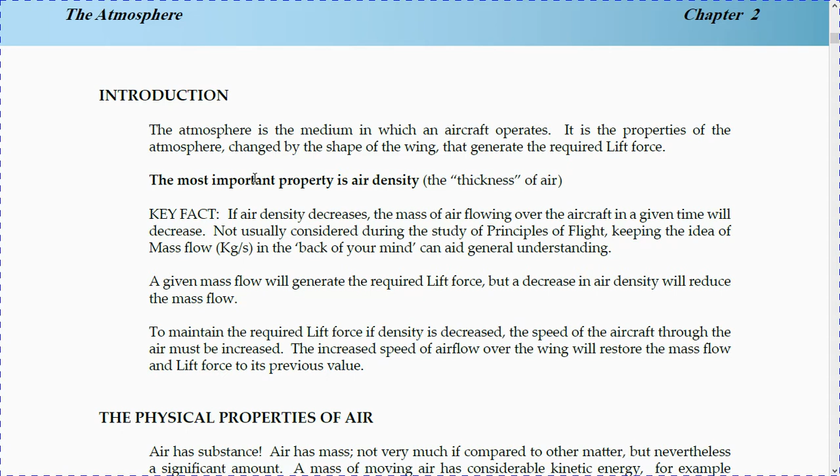Let's think of this as mass flow over the wings in terms of kilograms per second. A given mass flow will generate the required lift force, but a decrease in air density will reduce the mass flow. So to maintain the required lift force, if density is decreased, the speed of the aircraft through the air must be increased. So the increased speed of airflow over the wing will restore the mass flow and lift force to its previous value, as it says here.

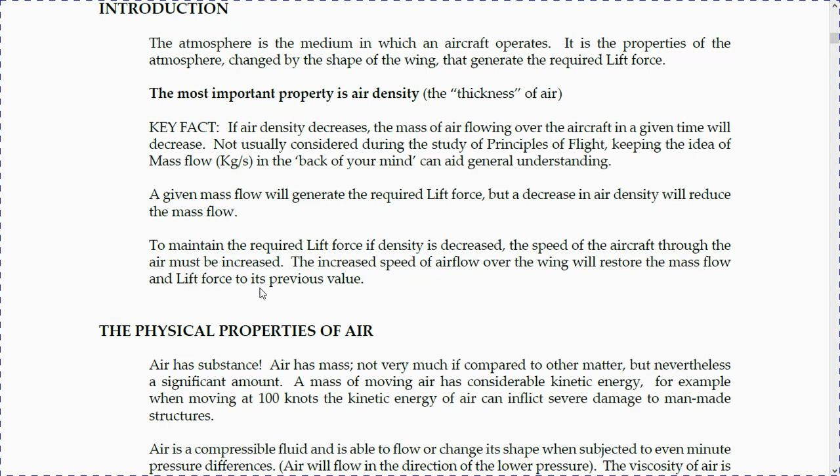So let's say, for example, 1 kilogram of air per second is passing over and under the wings. If the mass decreases, so the density decreases, let's say instead of 1 kilogram, 0.5 kilograms, 0.5 kilograms would need to pass over the wings not in 1 second but in half a second, so that in 1 second there will be a total of again 1 kilogram, if it makes sense. So there is the same amount in 1 second of a kilogram that passes through the wing, because it needs to be faster. So 0.5 kilograms in half a second would be 1 kilogram per second.

So, physical properties of air. Air has substance. A mass of moving air has considerable kinetic energy. For example, when moving at 100 knots, the kinetic energy of air can inflict severe damage to man-made structures. Air is a compressible fluid and is able to flow or change its shape when subject to even minute pressure differences. The viscosity of air is so low that very small forces are able to move the molecules in relation to each other.

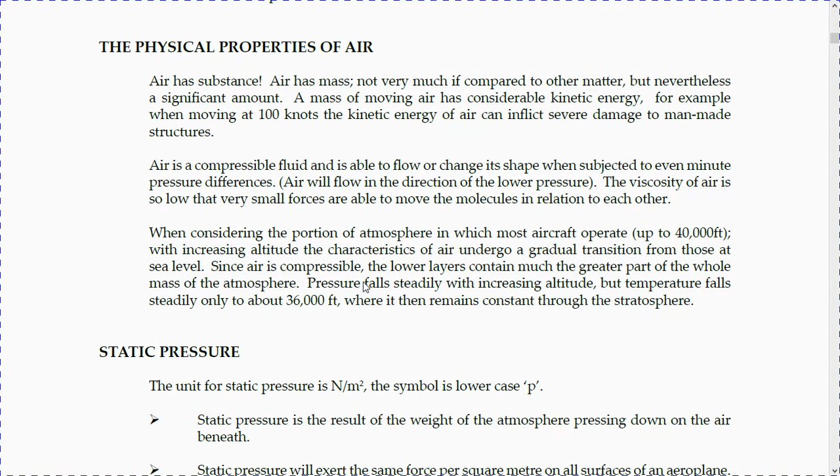When considering the portion of atmosphere in which most aircraft operate, so up to flight level 400, with increasing altitude, the characteristics of air undergo a gradual transition from those at sea level. Since air is compressible, the lower layers contain a much greater part of the whole mass of the atmosphere, if it makes sense. So air is compressible, so the lower layers close to sea level contain much more of the whole mass of the atmosphere, because the weight of the air plus gravity will make it compress. So at sea level there is much more air than as much as you climb, there will be much less air. So pressure falls steadily with increasing altitude, but temperature falls steadily only to about 36,000 feet, where it then remains constant through the stratosphere.

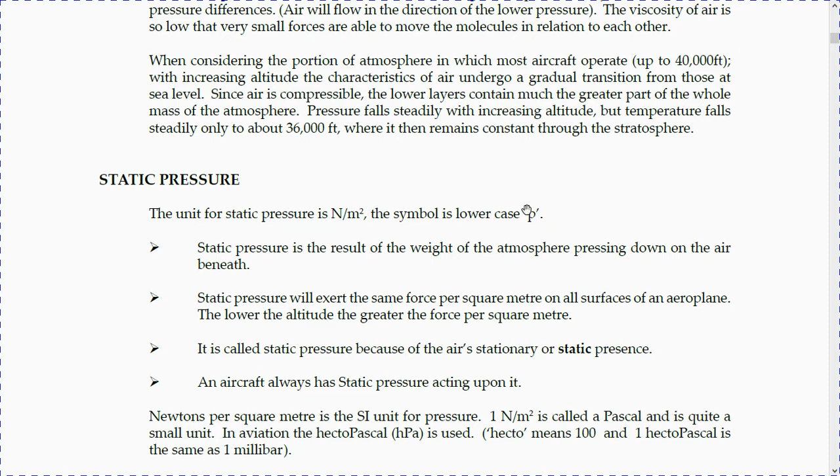So static pressure. The unit for static pressure is newtons per square meter, and the symbol is lowercase p. So static pressure is the result of the weight of the atmosphere pressing down on the air beneath, as I was saying before. Static pressure will also exert the same force per square meter on all surfaces of an airplane. The lower the altitude, the greater the force per square meter. It is called static pressure because of the air's stationary or static presence, because it's not moving.

Also, an aircraft always has static pressure acting upon it, like all objects, like everything. Newtons per square meter is the standard international unit for pressure. 1 Newton per square meter is called a Pascal, and it's quite a small unit. So in aviation, the hectopascal is used. Hecto means 100, so 1 hectopascal is the same as 1 millibar.

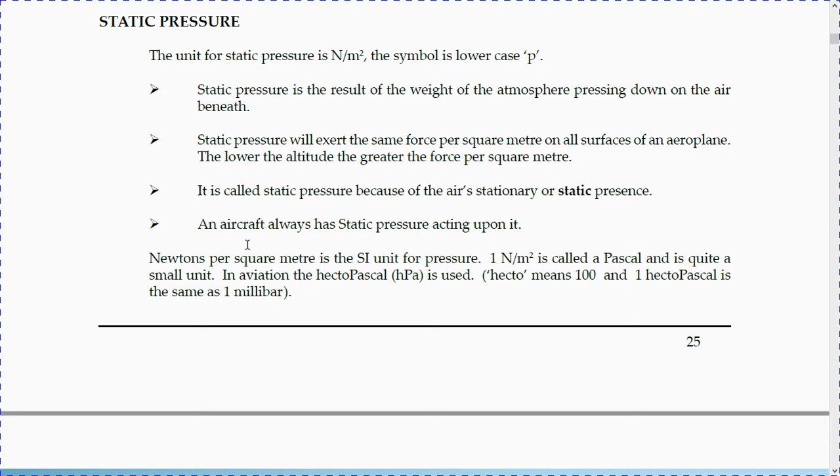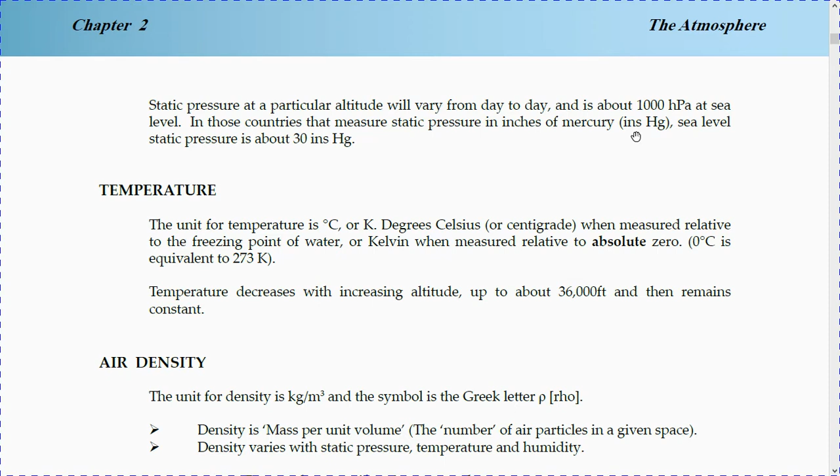Static pressure at a particular altitude will vary from day to day and is about 1000 hectopascals at sea level. Or in some countries, such as in the US, it is measured in inches of mercury, as you can see here. Sea level static pressure is about 30 inches of mercury.

Now we'll talk about temperature. The unit of temperature is degrees Celsius or centigrade, when measured from the freezing point of water, or Kelvin when measured from absolute zero. So 0 degrees Celsius is equivalent to 273 Kelvin. Temperature decreases with increasing altitude up to about 36,000 feet, and then remains constant, as we were saying before.

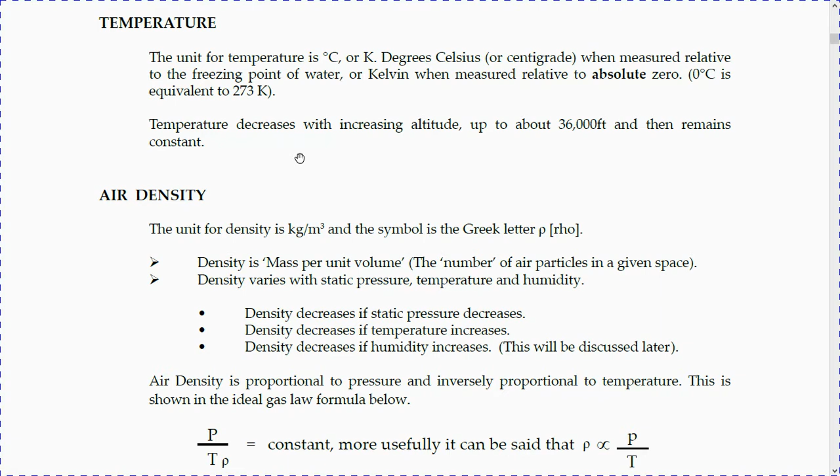Now, air density, very important. The unit for air density is kilogram per cubic meter, and the symbol is the Greek letter rho.

Density is mass per unit volume, so the number of air particles in a given space, as you can see here of its unit. So how many particles of air, what's the mass of this air in a given space, which will be a cubic meter.

Density varies with static pressure, temperature and humidity. So density decreases if static pressure decreases. So the higher you go, the less static pressure there is, so the less density there is. Density also decreases if temperature increases. So in a very hot day, let's say 40 degrees Celsius, density is lower than colder day at 10 degrees Celsius.

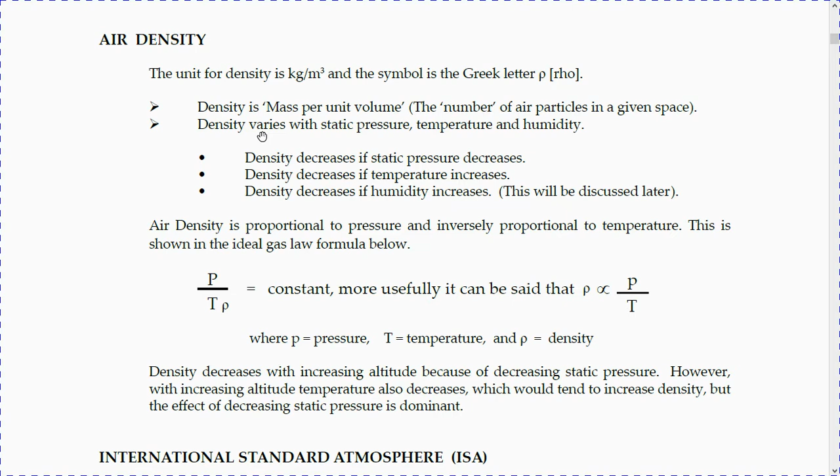Density decreases if humidity increases. We'll talk about this later. Water vapor is less dense than dry air. In a few words, air density is proportional to pressure and inversely proportional to temperature. This means that air density increases with an increase in static pressure, but air density decreases with an increase in temperature, as we were saying before.

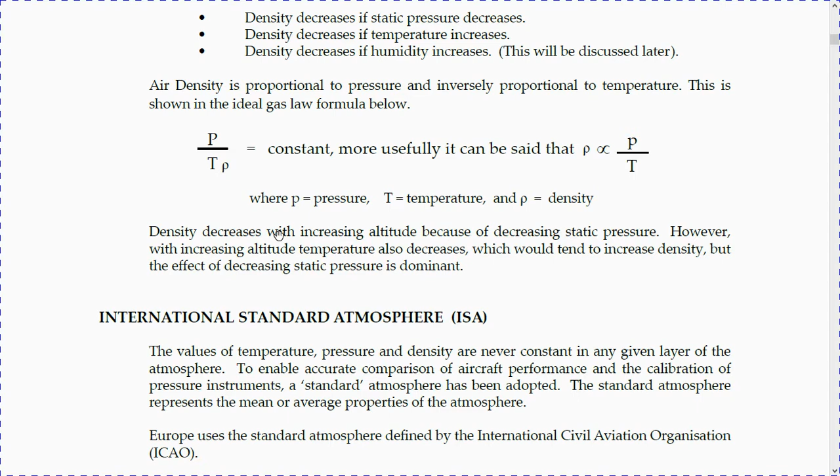So we can say in a few words that it's true that density decreases with increasing altitude because of decreasing static pressure. However, with increasing altitude, temperature also decreases, so density should get high again. But the effect of decreasing static pressure is dominant, which means that the decrease in static pressure with altitude has a stronger effect on air density than the fact that with increasing altitude the temperature decreases. So a decrease in temperature should give you a higher density, but the effect of static pressure is dominant over temperature.

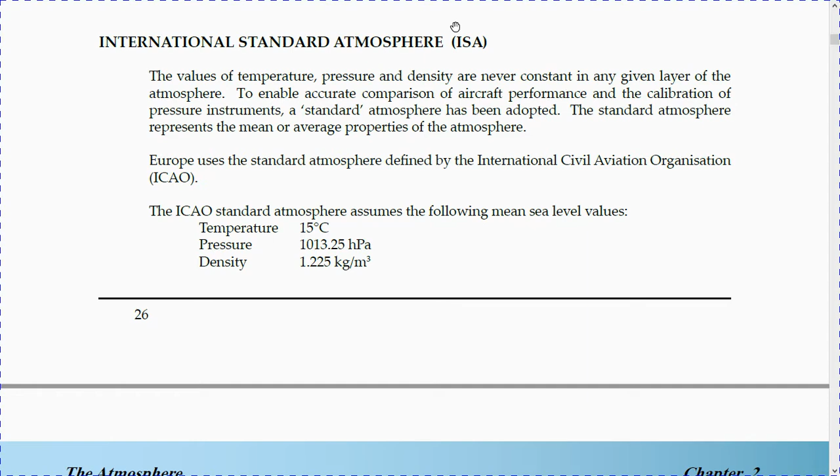We can talk now about International Standard Atmosphere, ISA. The values of temperature, pressure, and density are never constant in any given layer of the atmosphere. To enable accurate comparison of aircraft performance and the calibration of pressure instruments, a standard atmosphere has been adopted. So Europe uses the standard atmosphere defined by the International Civil Aviation Organization, ICAO. An ICAO standard atmosphere assumes the following mean sea level values.

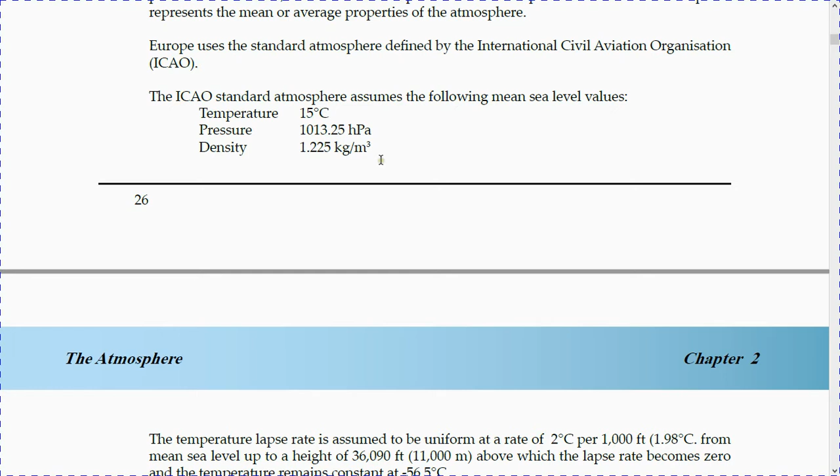So a temperature of 15 degrees Celsius, a pressure of 1013.25 hectopascal, and a density of 1.225 kilograms per cubic meter. The temperature lapse rate is assumed to be uniform at a rate of 2 degrees Celsius per 1000 feet. More precisely, 1.98 degrees Celsius from mean sea level up to a height of 36,090 feet, above which the lapse rate becomes 0 and the temperature remains constant at minus 56.5 degrees Celsius.

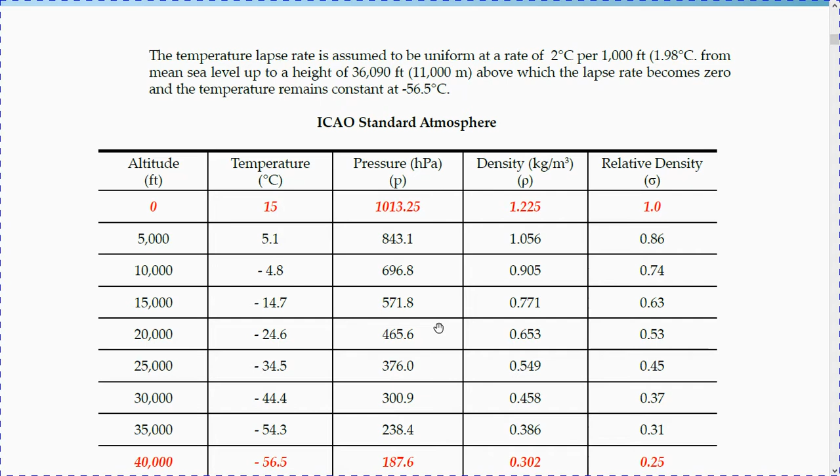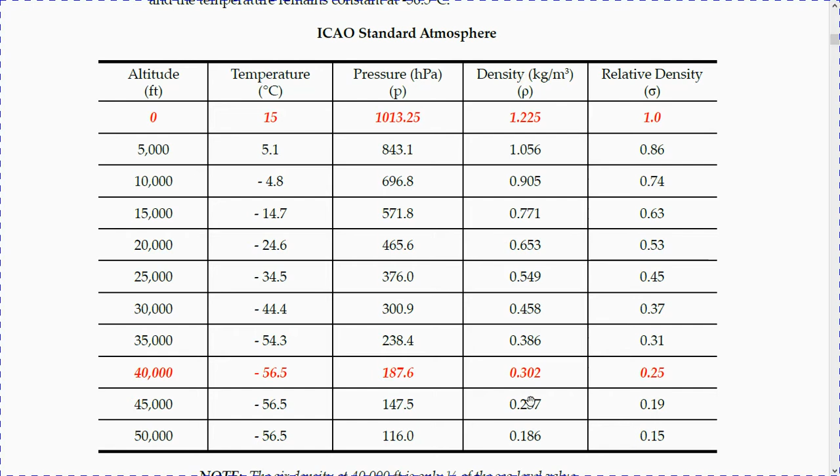So the standard lapse rate is 1.98 degrees per 1000 feet. Of course, this changes depending on the day, and it can be different. It can be 3 degrees per 1000 feet, or it can be 1 degree, but the standard is 1.98 degrees Celsius per 1000 feet. We can see here that at 40,000 feet, air density is about 1/4 of the one at sea level, and at 20,000 feet is about half.

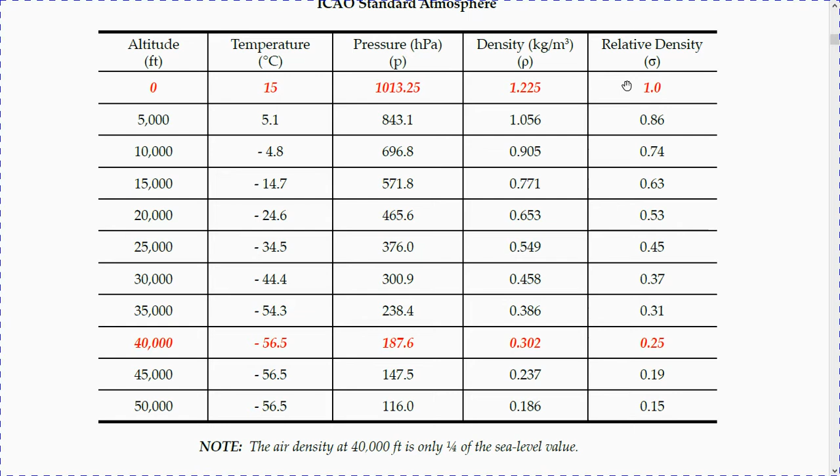Now we'll talk about dynamic pressure. The unit for dynamic pressure is Newton per square meter, and the symbol is lowercase q or uppercase Q. So this is dynamic pressure. This is the pressure caused by the air moving towards an object. Because air has mass, air in motion must possess kinetic energy and will exert a force per square meter on any object in its path.

As we remember, kinetic energy equals half of the mass multiplied by the square of speed, with speed in meters per second and mass in kilograms. It is called dynamic pressure because, as I was saying before, the air is moving in relation to the object being considered, in this case an aircraft. Dynamic pressure is proportional to the density of the air and the square of the speed of the air flowing over the aircraft. So an aircraft immersed in moving airflow will experience both static and dynamic pressure. So static is always there, and dynamic pressure whenever air is moving relative to the object.

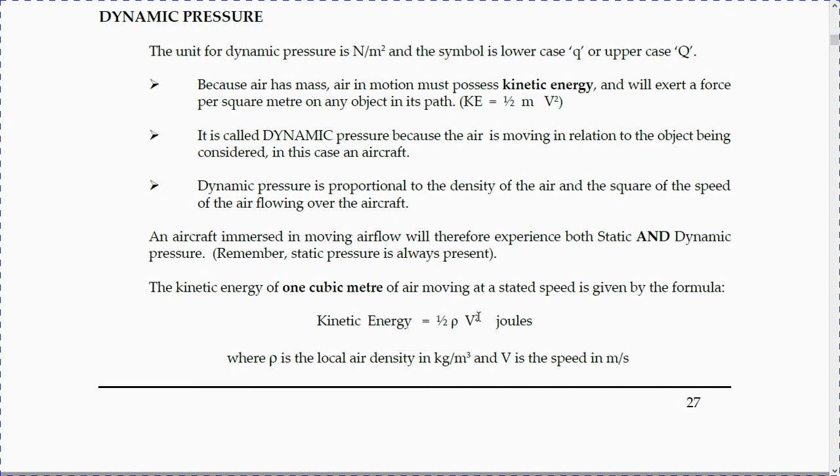So we use this formula: half of the mass, which means half of the air density in kilograms per cubic meter, multiplied by the square of speed in meters per second. If this cubic meter of moving air is completely trapped and brought to rest by means of an open tube, the total energy will remain constant, but being brought completely

to rest, the kinetic energy will become pressure energy, which for all practical purposes is equal to half rho multiplied by square speed, and will give you newtons per square meter, because again this energy becomes a force, and force is measured in newtons per square meter.

So let's consider air flowing at 52 meters per second, which is 100 knots. So let's remember, to find meters per second, they are about half of nautical miles per hour, or knots. So 100 knots is approximately 50 meters per second, and 2 meters per second is approximately 4 knots. So consider this air flowing at 100 knots with a density of 1.225 kilograms per cubic meter.

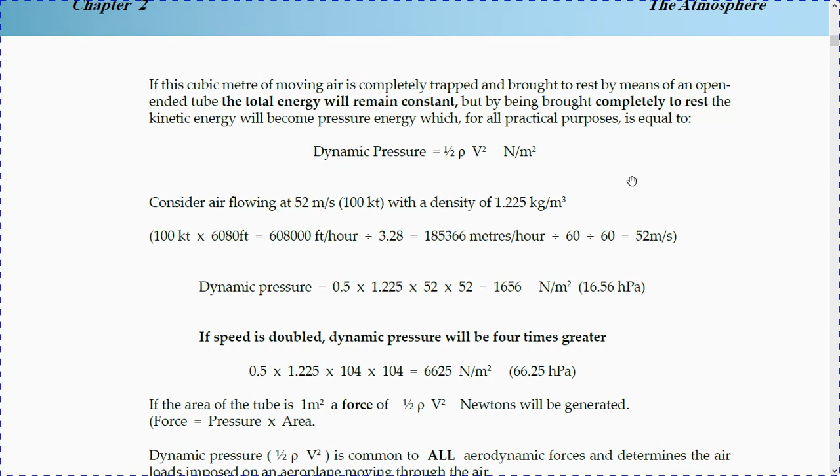Now let's say we want to convert this into meters. We know that 1 meter equals 3.28 feet, or 3.28 feet equals 1 meter. So if we divide this 608,000 feet by 3.28, it will give us 185,366 meters per hour. Now divided by 60 we have minutes, divided by 60 again we have seconds, and so this gives us 52 meters per second. Now we can work out the pressure.

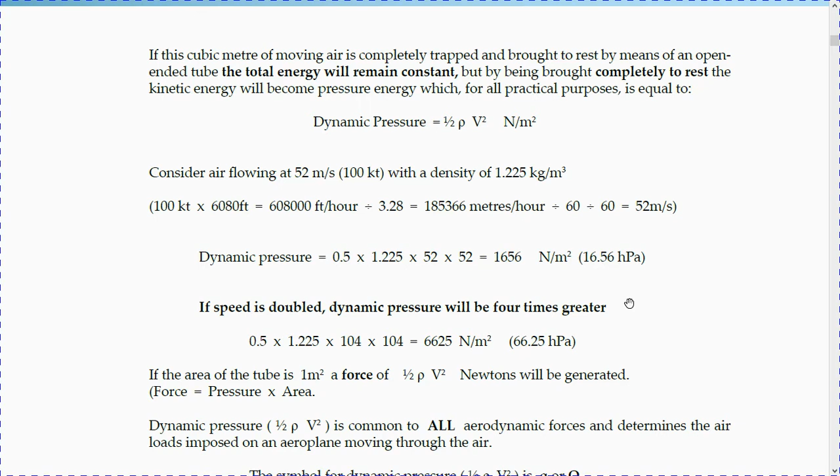So let's apply the formula. Dynamic pressure of this density at this speed is, let's halve this density as it says here. We have to halve it, so we multiply by 0.5, multiply by the square of speed, 52, and it gives us 1,656 newtons per square meter, which will be 16.56 hectopascal. As we can see here, if speed is doubled, dynamic pressure will be 4 times greater.

If the area of the tube is 1 square meter, a force of half rho square speed newtons will be generated. Force equals pressure multiplied by area. So we can say dynamic pressure, half rho multiplied by square speed, is common to all aerodynamic forces and determines the air loads imposed on an airplane moving through the air. The symbol for dynamic pressure is the letter Q, so Q is equal to half rho multiplied by square of speed.

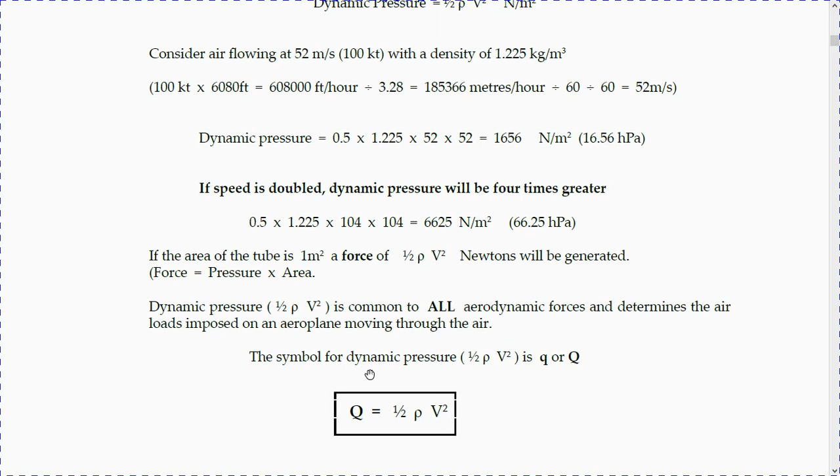Key facts. A pilot needs to know how much dynamic pressure is available, but dynamic pressure cannot be measured on its own because static pressure will always be present. So the sum of static and dynamic pressure is known as total pressure, or stagnation or pitot pressure. Total pressure equals static pressure plus dynamic pressure, because you need to consider both of those. There is dynamic pressure on a certain body, but the static pressure is always present, so you need to add that as well.

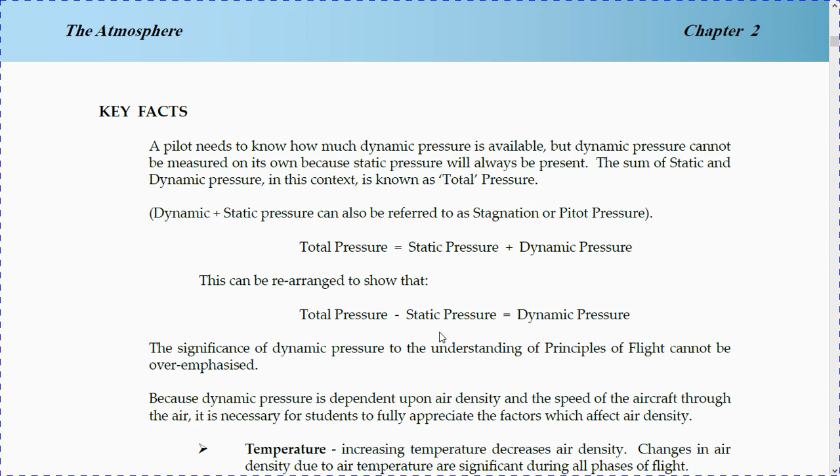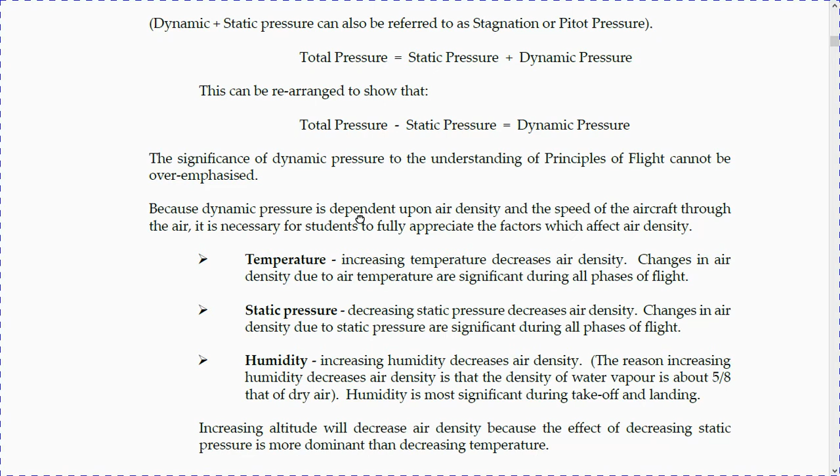This can be arranged so that total pressure minus static pressure will give you dynamic pressure. So if you have an instrument to measure total pressure, and you know static pressure because you know the air density and the altitude at which you are, you can calculate your dynamic pressure, so the flow of mass of air over your aircraft. This is very important.

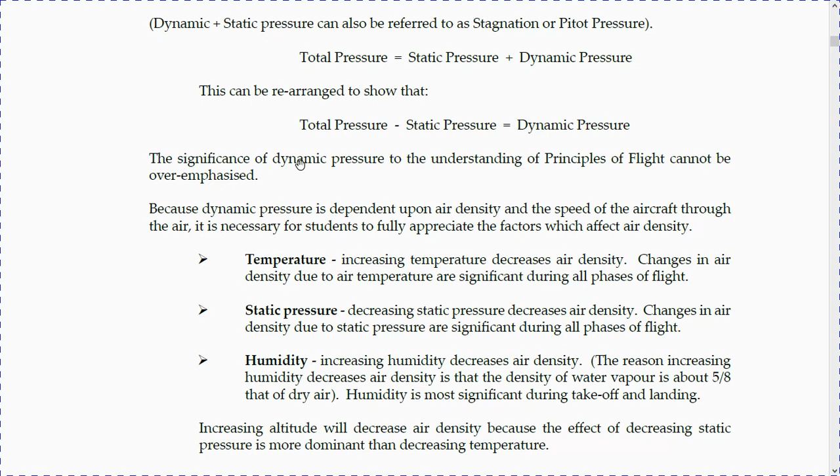Because dynamic pressure is dependent upon air density and the speed of the aircraft through the air, it is necessary for students to fully appreciate the factors which affect air density. Again, let's recap. Increasing temperature decreases air density. Decreasing static pressure decreases air density. Increasing humidity decreases air density. The reason, we can talk about it now, is that the density of water vapor is about 5/8 that of dry air.

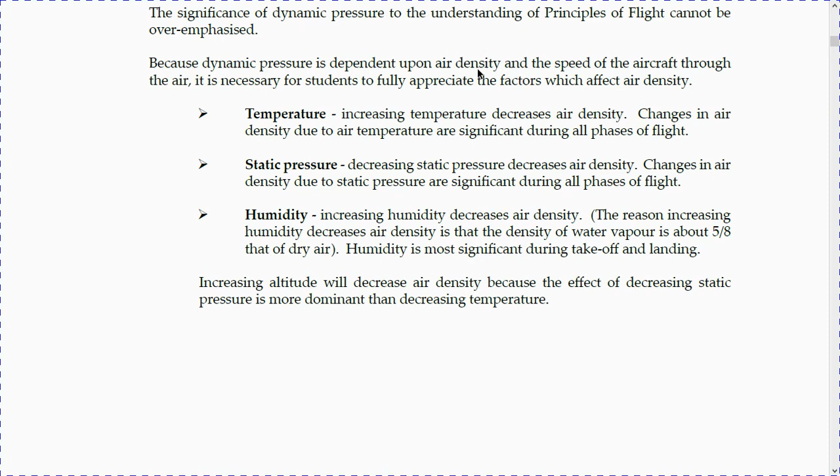Increasing altitude will decrease air density because the effect of decreasing static pressure is more dominant than decreasing temperature. So dynamic pressure is so important that we need to have an instrument, a means for measuring dynamic pressure. A sealed tube open at the forward end is located where it will collect air when the aircraft is moving.

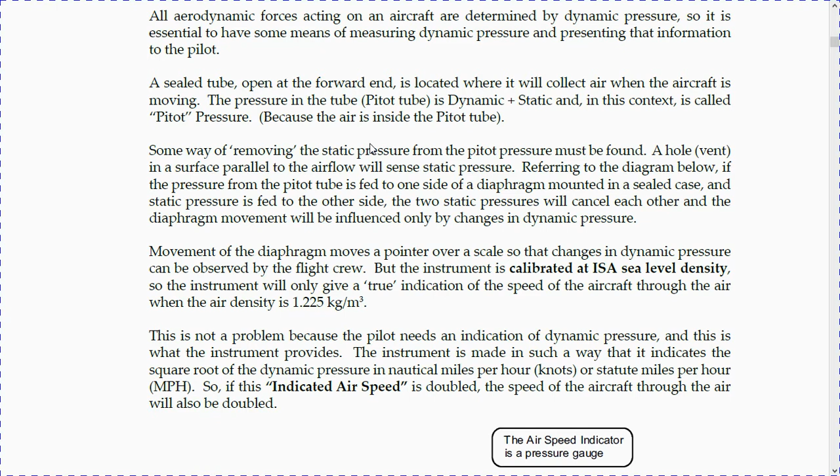The pressure in the tube, the pitot tube, in fact, is dynamic plus static, and in this context it's called pitot pressure because the air is inside the pitot tube. As we were saying before, pitot pressure is the same as saying static plus dynamic pressure, or total pressure. So there must be a way of removing the static pressure from the pitot pressure.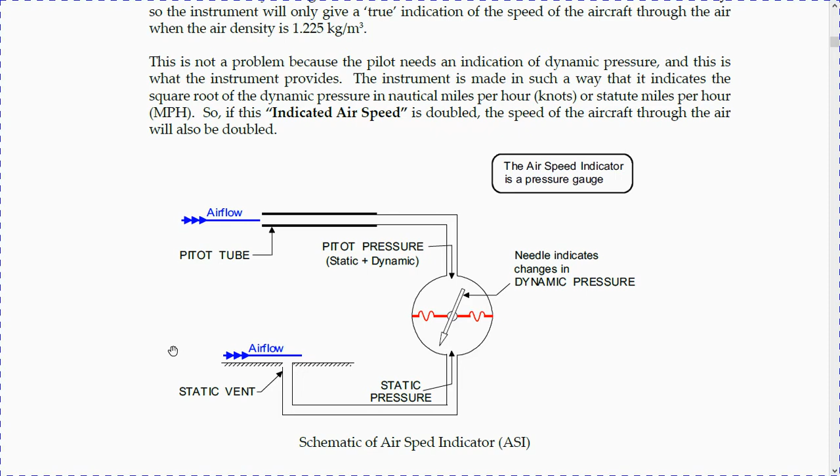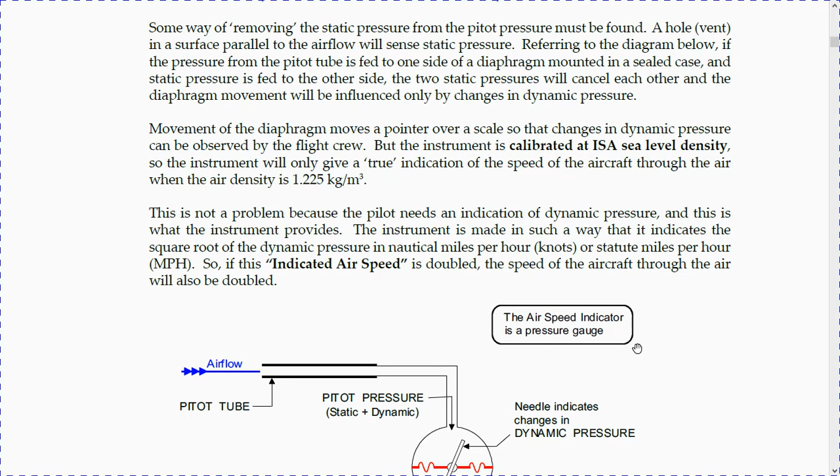Referring to the diagram below, if the pressure from the pitot tube is fed to one side of a diaphragm mounted in a sealed case, and static pressure is fed to the other side, the two static pressures will cancel each other, and the diaphragm movement will be influenced only by changes in dynamic pressure.

So, which means that the static vent will apply a little bit of pressure on the other side of this diaphragm, just enough to cancel its part of the total pressure, so the static pressure. So the static pressure will exert an opposite force on the needle, as much as there is static pressure. So when the total pressure is fed to the instrument, only the dynamic pressure will be indicated in the instrument because of the static pressure acting in an opposite way.

So movement of the diaphragm moves a pointer over a scale, so that changes in dynamic pressure can be observed by the flight crew. But the instrument is calibrated at ISA sea level density. So the instrument will only give a true indication of the speed of the aircraft through the air when air density is 1.225 kilograms per cubic meter, which, as we know, is not always the case.

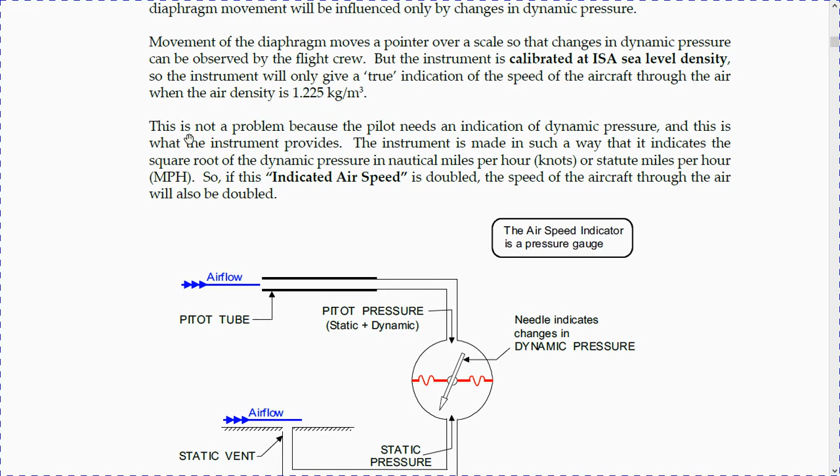So let's talk about speeds a little bit. The first speed we have, the basic form, is indicated airspeed, the speed registered on the airspeed indicator, ASI. Then we have calibrated airspeed.

CAS is an accurate measure of dynamic pressure when the aircraft is flying slowly. The position of the pitot tube and static vent, together with the aircraft's configuration, flap, landing gear, etc., and attitude to the airflow, angle of attack and sideslip, will affect the pressure sensed, particularly the pressure sensed at the static vents. So when the airplane is flying level, straight, at a certain speed, that's the way it is being calibrated. It reads a certain speed.

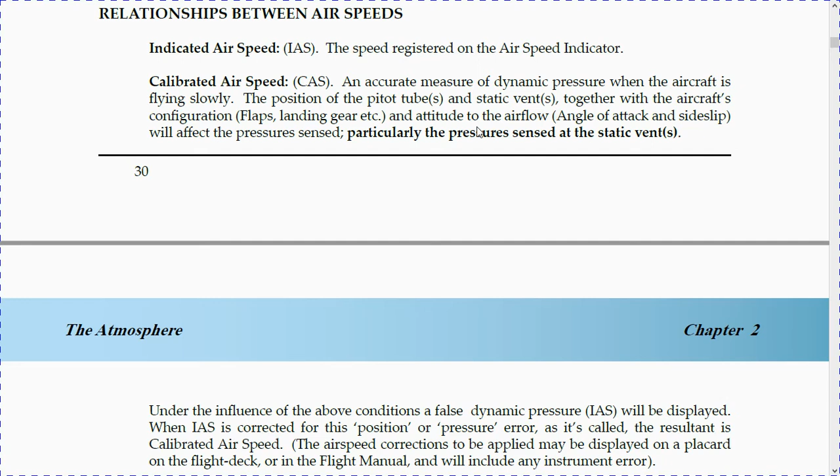But if the airplane is flying in a sideslip, for example, there's more air getting into the static vent, which will be at the side of the airplane, or the pitot tube is angled, for example upwards. If the angle of attack is very high, the pitot tube will be angled upwards and there will be less air flowing to the pitot tube. So there is a way to calibrate the speed to account for this error.

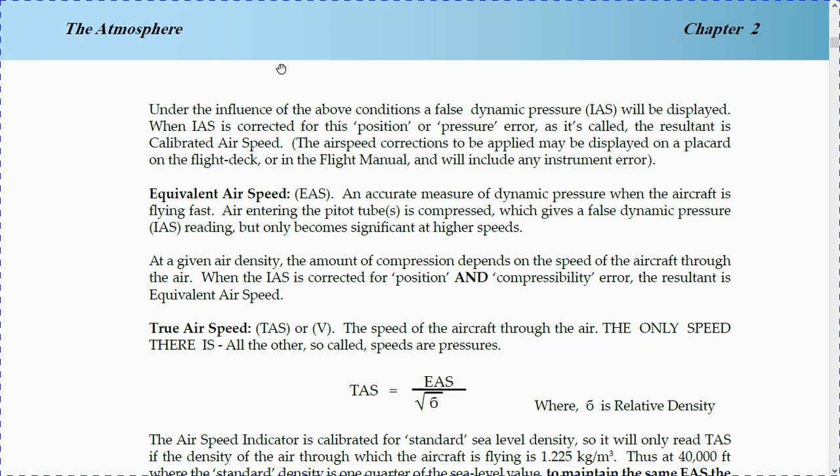So under the influence of the above conditions, a false dynamic pressure IAS will be displayed. When IAS is corrected for this position or pressure error, it's called calibrated airspeed. After indicated airspeed has been corrected for any instrument, pressure or position error, it becomes calibrated airspeed.

Now we have equivalent airspeed, an accurate measure of dynamic pressure when the aircraft is flying fast. The air entering the pitot tube is compressed, which gives a false dynamic pressure IAS reading. This only becomes significant at higher speeds. So the air gets compressed and it gives a false indication. At any given air density, the amount of compression depends on the speed of the aircraft through the air. So when IAS is corrected for position and compressibility, the result is EAS, equivalent airspeed. So CAS corrected for compressibility gives EAS, or equivalent airspeed.

After this, there is true airspeed, or V. That's the final speed, the speed of the aircraft through the air, basically. The only speed there is, as the book says. All the other so-called speeds are pressures. So this is the actual speed of the aircraft through the air.

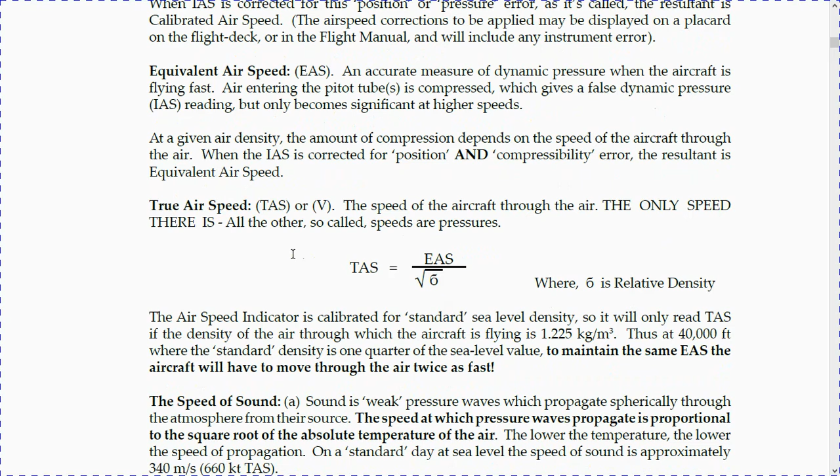The airspeed indicator is calibrated for standard sea level density. So it will only read true airspeed if the density of the air through which the aircraft is flying is, again, the standard density, 1.225 kilograms per cubic meter. Thus, at 40,000 feet, where the standard density is 1/4 of the sea level value, to maintain the same EAS, the aircraft will have to move through the air twice as fast.

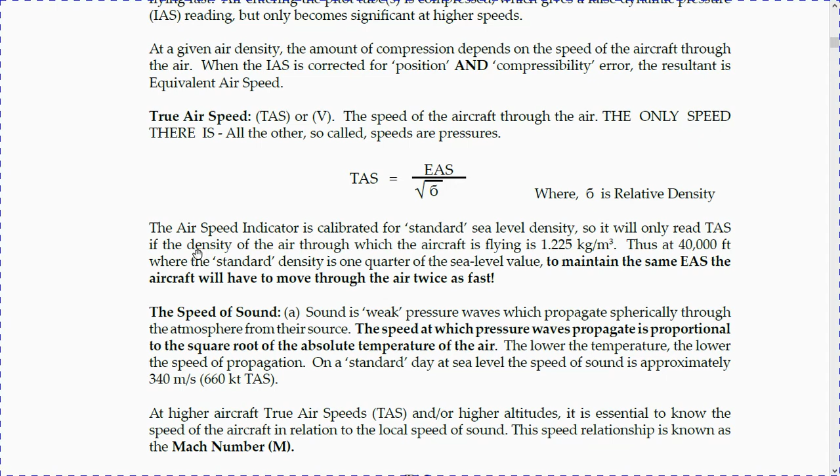The speed of sound, A. Sound is weak pressure waves that propagate spherically through the atmosphere from their source. The speed at which pressure waves propagate is proportional to the square root of the absolute temperature of the air. The lower the temperature, the lower the speed of propagation. On a standard day at sea level, the speed of sound is approximately 340 meters per second, about 660 knots true airspeed.

At higher aircraft true airspeeds and/or higher altitudes, it is essential to know the speed of the aircraft in relation to the local speed of sound. The speed relationship is known as the Mach number. So, at higher altitudes, with a decreased temperature, for example, we said minus 56 degrees Celsius, the sound propagates at a slower speed.

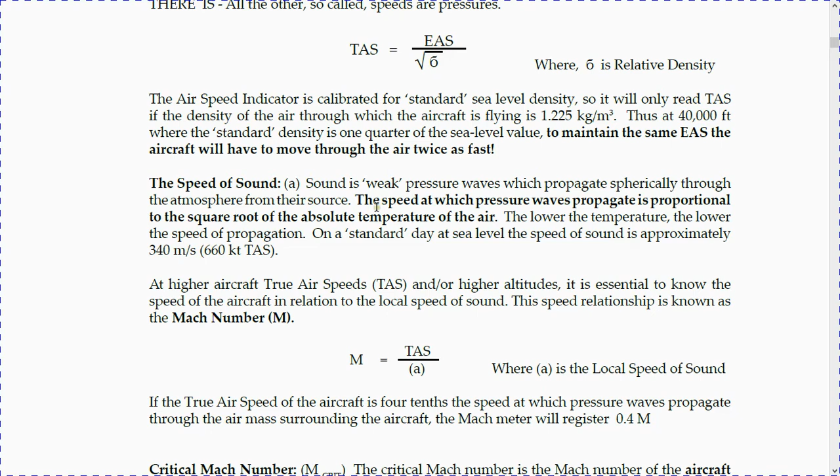So we need to know the relation of the aircraft to the Mach number, because if the speed of sound at sea level on a standard day is 660 knots, at 40,000 feet it could be much lower, and the airplane could be flying very close to the speed of sound. So Mach number is true airspeed over A, which is the local speed of sound. So if the true airspeed of the aircraft is 4/10 the speed at which pressure waves propagate through the air mass, the Mach meter will register 0.4 Mach.

Critical Mach number. The critical Mach number is the Mach number of the aircraft when the speed of the airflow over some part of the aircraft, usually the point of maximum thickness of the airfoil, first reaches the speed of sound. The point of maximum thickness of an airfoil, as we will see later, is the point where air accelerates. So that's the first part of the airplane that reaches the speed of sound, while the rest of the airplane is at a little bit lower than the speed of sound.

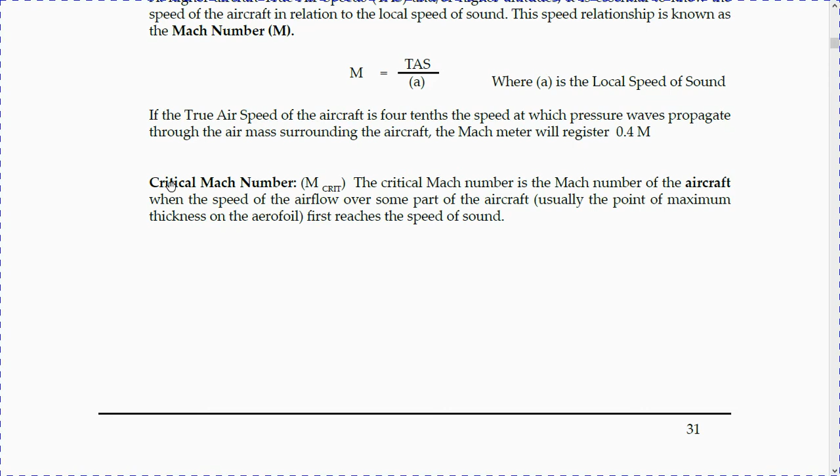Airspeed. The airspeed indicator is really a pressure gauge, the needle of which responds to changes in dynamic pressure, half rho V squared. This is very important. The airspeed indicator is a pressure gauge.

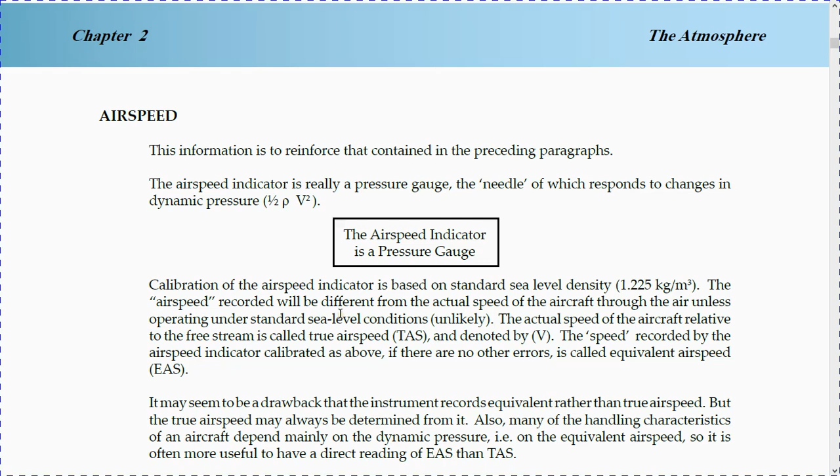Calibration of the airspeed indicator is based on a standard sea level density, 1.225 kilograms per cubic meter. The airspeed recorded will be different from the actual speed of the aircraft through the air unless operating under standard sea level conditions. Unlikely, it says here. The actual speed of the aircraft relative to the free stream is called true airspeed and denoted by the letter V. The speed recorded by the airspeed indicator, calibrated as above, if there are no other errors, is called equivalent airspeed.

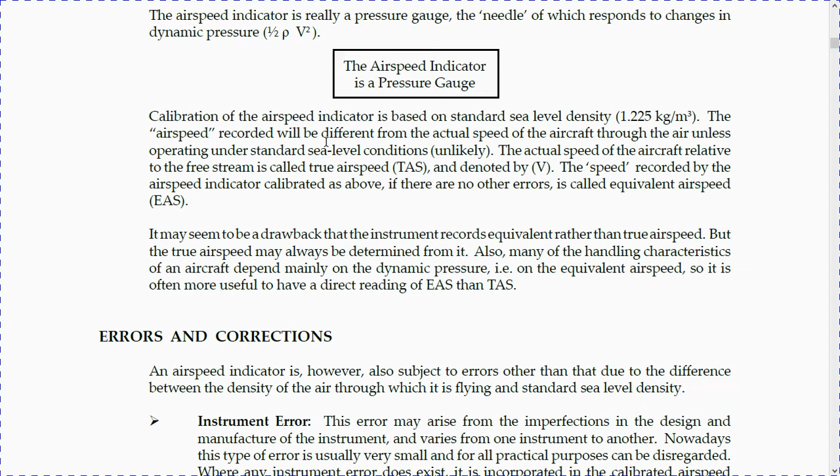Okay, errors and correction. An airspeed indicator is, however, also subject to errors other than that due to the difference between the density of the air through which it is flying and a standard sea level density. So there is instrument error. This error may arise from imperfections in the design and manufacture of the instrument and varies from one instrument to another. Nowadays this is very small and can be disregarded. When any instrument error does exist, it is incorporated in the calibrated airspeed correction chart for the particular airplane. So they will calculate any instrument errors.

So whenever you have your calibrated airspeed, some manual will give you a planned or calculated true airspeed, which is calibrated airspeed corrected for temperature.

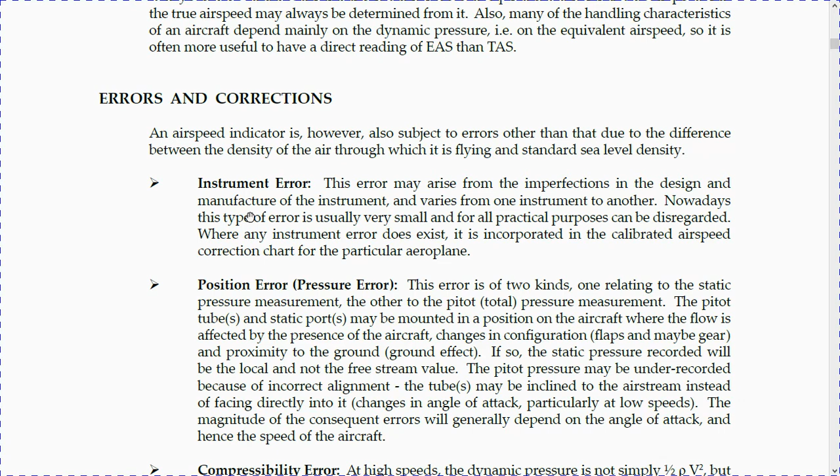So everything is instrument errors taken into account on the manual of the aircraft. Then there's position error, pressure error. This error is of two kinds, one relating to the static pressure measurement, the other to the pitot pressure measurement.

As I was saying before, the pitot tube and static ports may be mounted in a position on the aircraft where the flow is affected by the presence of the aircraft. Changes in configuration and proximity to the ground, everything can affect the airflow passing through these two vents, the hole in the pitot tube and the static port. So if so, the static pressure recorded would be the local and not the free stream values.

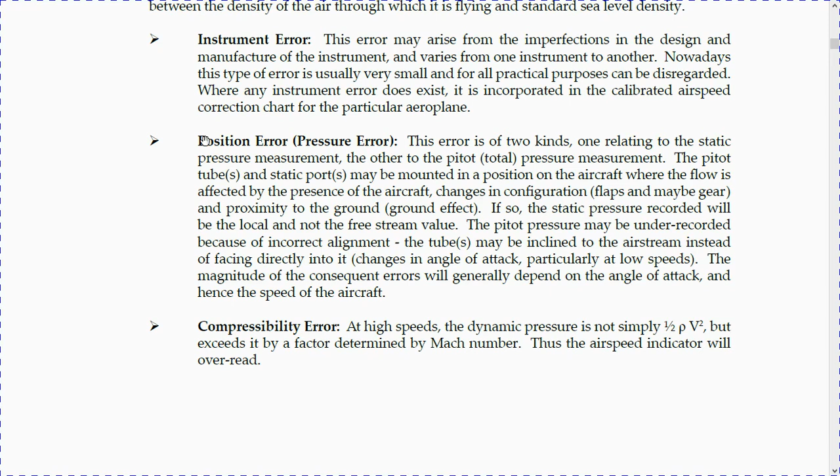The pitot pressure may be under-recorded because of incorrect alignment with the air free stream. The tubes may be inclined to the airstream instead of facing directly into it. So changes angle of attack, as I was saying before. So the magnitude of the consequent errors will generally depend on the angle of attack. Compressibility error at high speeds.

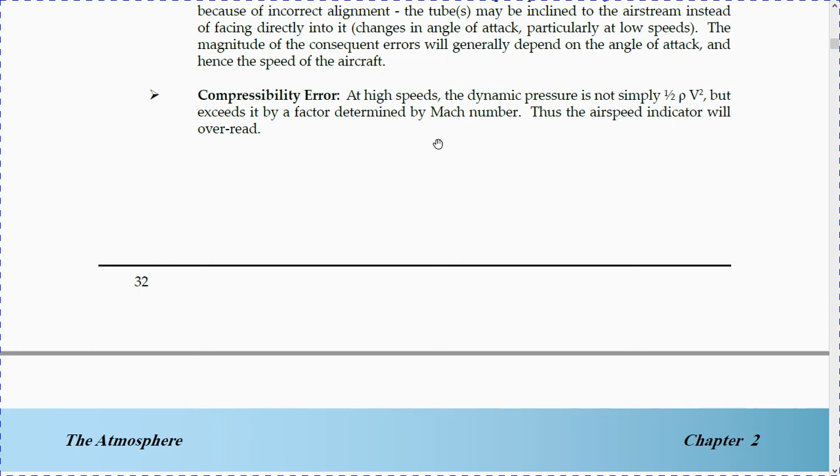The dynamic pressure is not simply half rho multiplied by speed squared, but exceeds it by a factor determined by the Mach number. Thus, the airspeed indicator will overread. So it will overread when air is being compressed. Depending on the Mach number, the air will be compressed and will give you a higher reading than what actually is. So this is very important.

V speeds, for example, VS, V1, VR, V2, VMD, VMC, VYSE, many others. These are calibrated airspeeds because they relate to aircraft operations at low speeds. However, the appropriate corrections are made and these speeds are supplied to the pilot in the flight manual as indicated airspeeds. So VMO, the maximum operating indicated airspeed is, however, an EAS because it is a high speed, but again is supplied to the pilots in the flight manual as an IAS.

So the speeds are calculated and calibrated as EAS, CAS, calibrated airspeed, but the pilot reads only his airspeed indicator. So it needs to be corrected again backwards to match what the pilot will read. So if the calibrated airspeed will be 60 knots, but the pilot in reality reads a little less, 55. The VMO read by the pilot will be 55 in indicated airspeed, although what's being calculated was 60 in reality.

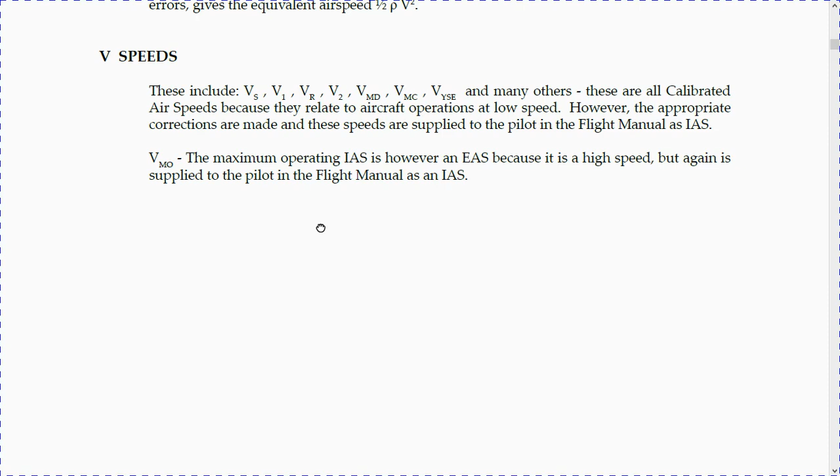So to sum up, dynamic pressure Q is affected by changes in air density. So Q equals half rho v squared. Rho is the air density. Standard is 1.225 kilograms per cubic meter, and this multiplied by the square of speed. Air density decreases if atmospheric pressure decreases. Air density decreases as well if temperature increases, and air density decreases if humidity increases.

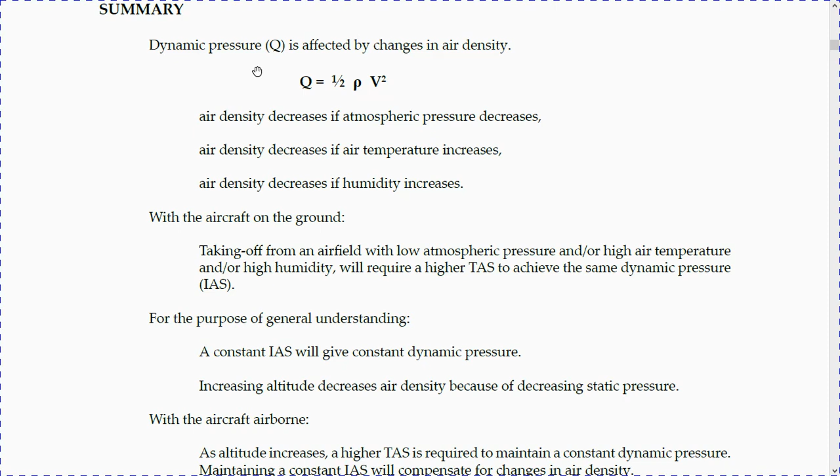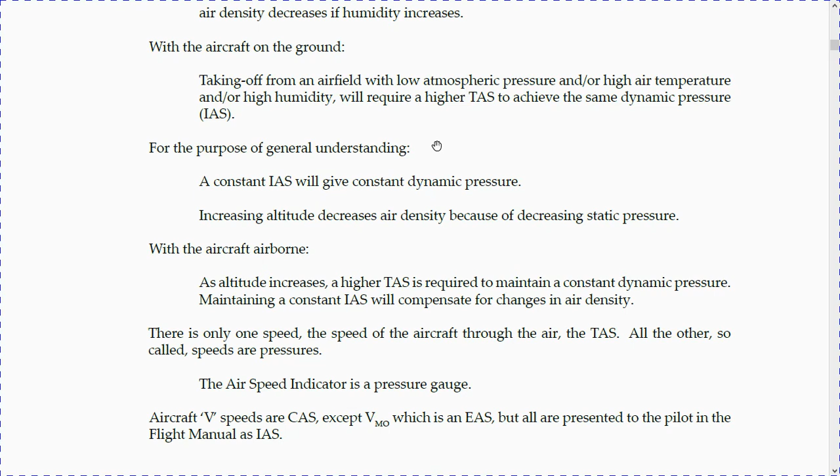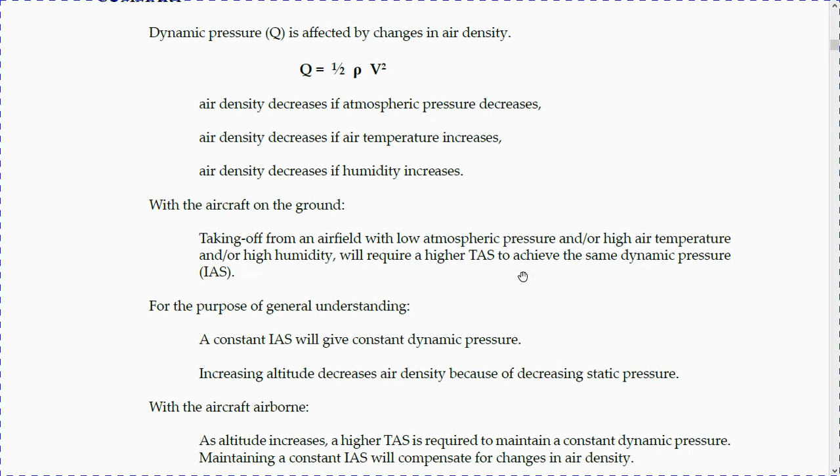With the aircraft on the ground, taking off from an airfield with low atmospheric pressure and high temperature and high humidity, this will require a higher true airspeed to achieve the same dynamic pressure. As we said here, if the air density is decreased by a lot, let's say low atmospheric pressure, high temperature and high humidity, speed must be increased to obtain the same lift force, the same as saying to achieve the same dynamic pressure, indicated airspeed. So for purpose of a general understanding, a constant indicated airspeed will give constant dynamic pressure.

Increasing altitude decreases air density because of decreasing static pressure. With the aircraft airborne, as altitude increases, a higher true airspeed is required to maintain a constant dynamic pressure, because of course density decreases. Maintaining a constant indicated airspeed will compensate for changes in air density.

So, constant indicated airspeed means that the airspeed indicator is reading a constant dynamic pressure, which means that you're actually going faster. Because if the dynamic pressure is indicated to be the same, for example 80 knots, but you know that air density is decreasing, so dynamic pressure should be decreasing unless speed is increasing. So climbing at 80 knots indicated airspeed will compensate for the decrease in air density, because the instrument reads what actually is passing over the wings.

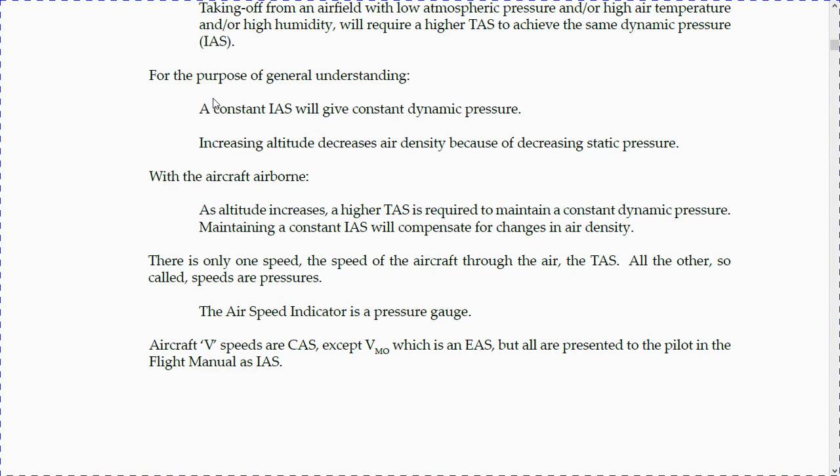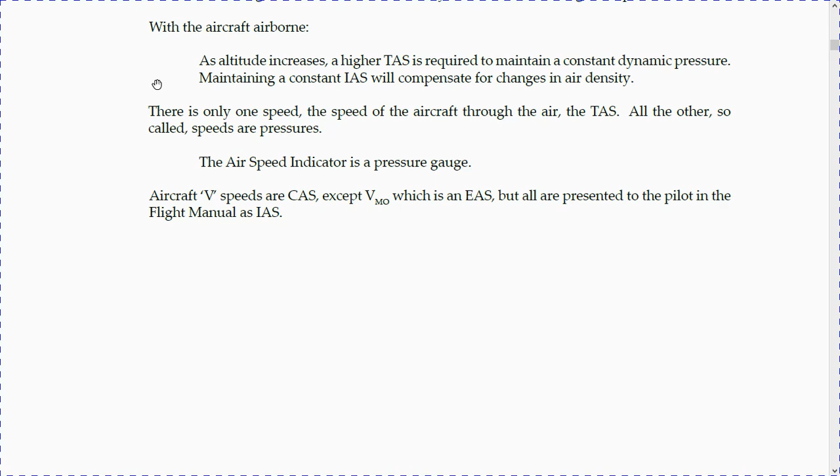There is only one speed, the speed of the aircraft through the air, the true airspeed. All the others, so-called speeds, are pressures. The airspeed indicator is a pressure gauge. Aircraft V speeds are calibrated airspeeds, except VMO, which is the maximum operating speed, which is an EAS, equivalent airspeed. But all are presented to the pilot in the flight manual as indicated airspeeds, because this is the only thing that the pilot will read on his airspeed indicator.